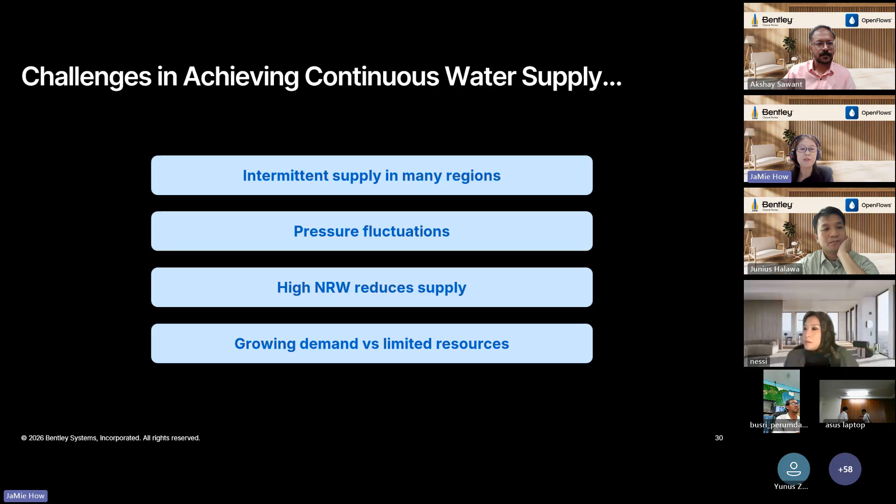And in many regions today, as you can see from this slide here, achieving continuous water supply is still a major challenge. And intermittent supply is very common and often due to pressure fluctuations and system inefficiencies. So at the same time, high levels of non-revenue water will reduce the amount of water that is actually available for distribution. And with growing demand, water bodies or agencies are also under pressure to do more with limited resources. So the challenge here is not just about producing the water supply, but also delivering it more reliably, consistently and efficiently as well.

So if we look across the three parts, like what we mentioned just now, part one was on identifying and reducing the losses. Part two was on real-time operational intelligence. And now in part three, we bring all this together to scale toward a continuous supply. Because achieving continuous supply is not just one step, it's a result of continuous and cumulative improvement in your whole network or system.

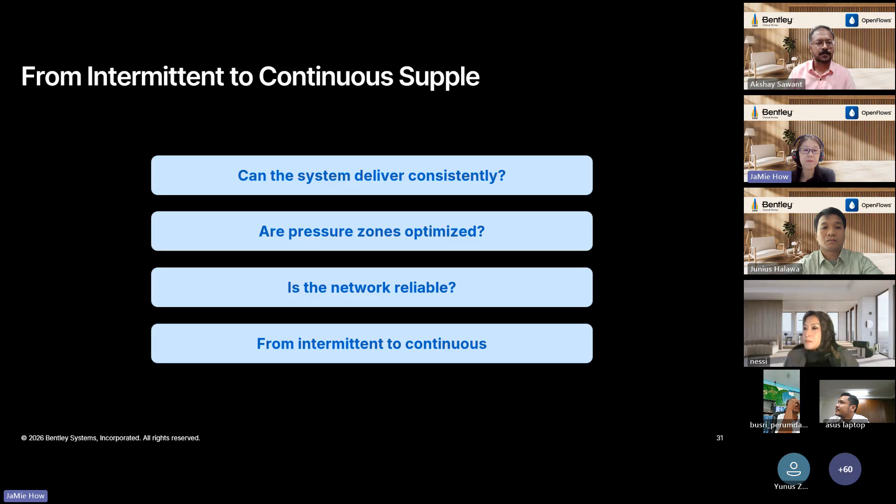So for this, they need a large scale and reliable water distribution system. And by doing that, an 80-kilometer regional water supply system was then developed to support this large-scale distribution. And using OpenFlows Water and digital workflows, they were able to carry out all detailed assessment like pipeline sizing, assessing the pressure zones, and also pump efficiencies.

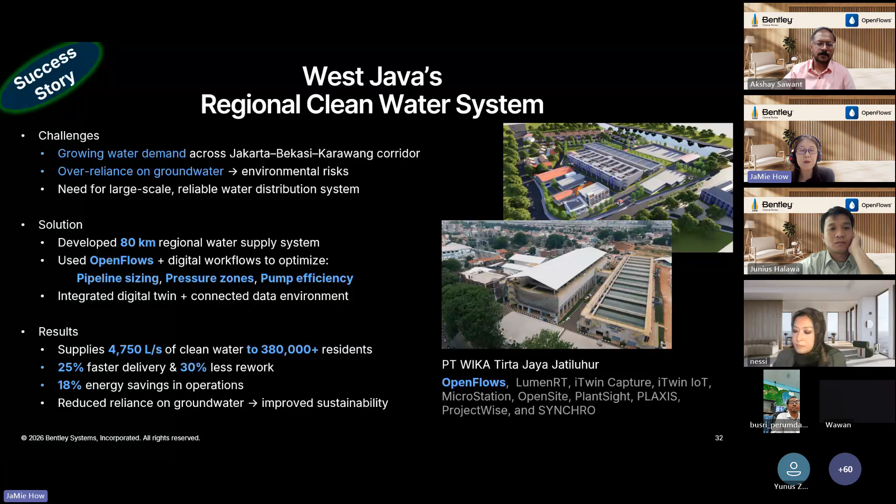Today, the system now delivers approximately 4,750 liters per second to more than 380,000 residents in that area. So by optimizing the network design, the project achieved faster delivery timelines and also reduced reliance on groundwater. So this case study here shows how infrastructure and system planning come together to enable a reliable water supply at a large scale.

And so to support this kind of system and planning optimization, water bodies or utilities need to have the ability to model, simulate and evaluate the different scenarios in the network or in the system. So this is where OpenFlows plays a key role in your hydraulic model. OpenFlows not only supports water distribution networks, it also supports wastewater and stormwater network systems as well. So it will help all of you engineers and water bodies and agencies to test different kinds of strategies, understand the system behavior better, and also make more informed decisions before any implementation is done.

So the three core OpenFlows solutions, the water, the sewer, and the storm, are also complemented by the OpenFlows Hydraulic Toolset and OpenFlows Flood. The Hydraulic Toolset is for calculation of specific components, and OpenFlows Flood is for advanced flood risk analysis and assessment purposes.

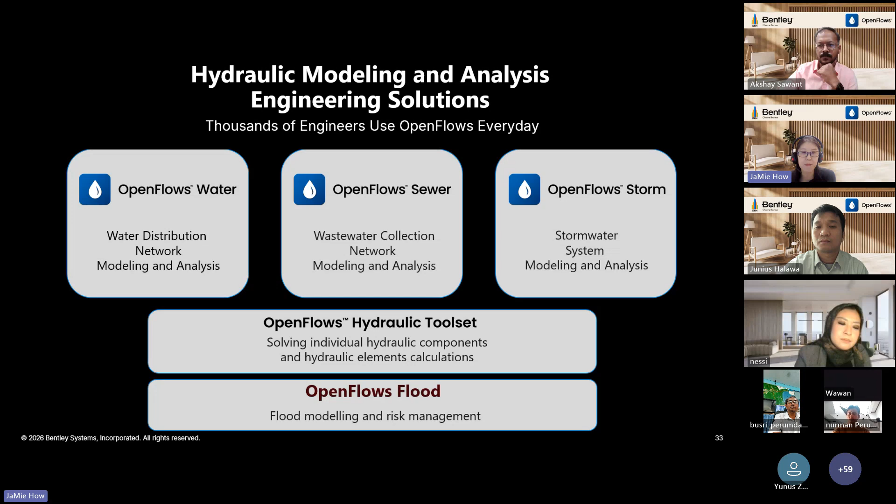And the tiers, we have also shown this in earlier parts, mainly defined based on your model capacity and the extent or requirement of your assessment, such as the number of pipes or elements. So you can choose a setup that fits the scale of your network or the system that you want to study. So each tier uses the same modeling environment and methodology, just with increasing capability. As we can see here, OpenFlows Water is our focus for today.

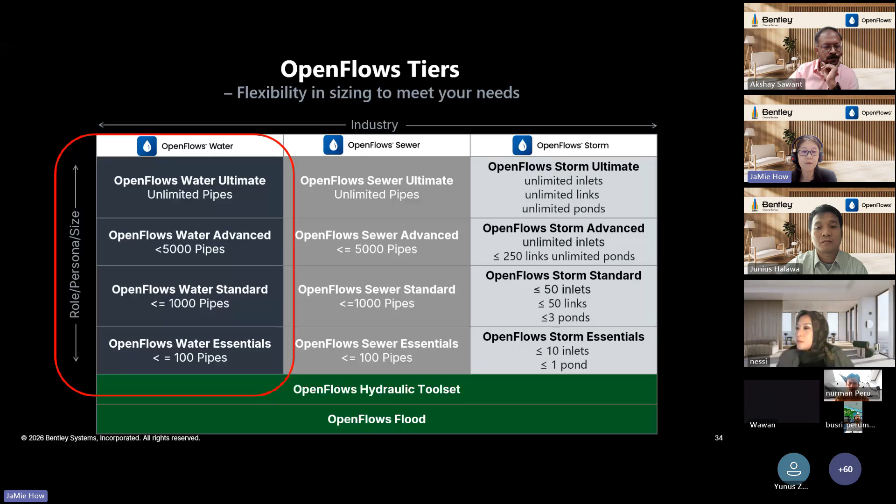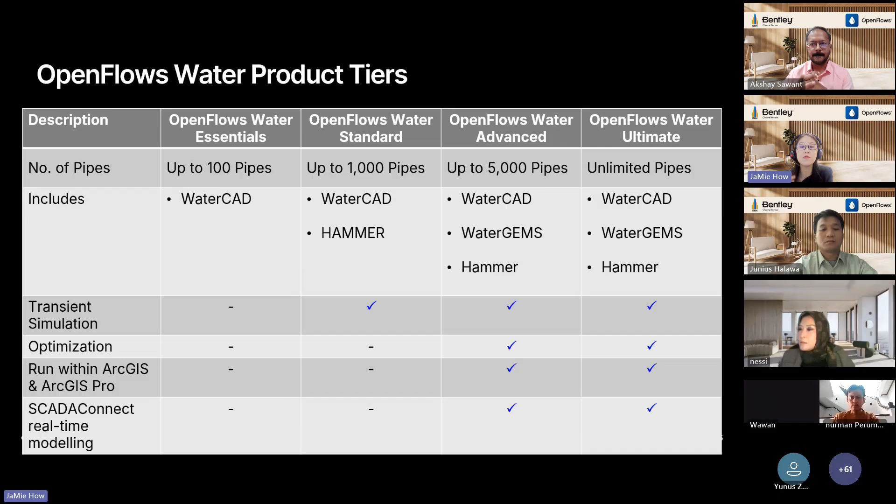And this slide here is just a very simplified comparison that shows how each tier supports different levels of your assessment, depending on the complexity of your system and the type of study that you want to perform. So from very basic network modeling to more advanced capabilities from left to right, like transient analysis and optimization, the higher tiers will allow you to evaluate all this in your system in greater detail and make a more informed and better decision on your system. So this is very valuable when planning for system improvements and when you want to move towards a more continuous water supply system.

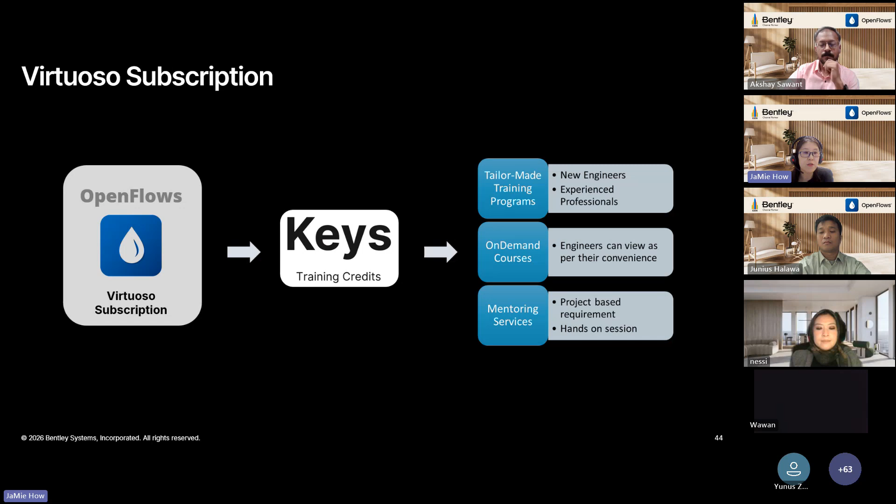So since today's focus is on water, we are just going to look into the water solution, OpenFlows Water.

The essentials and standard tiers come with 1 key per license, and the advanced and ultimate tiers come with 2 keys per license. 1 key is almost 2 hours of free training that you can redeem.

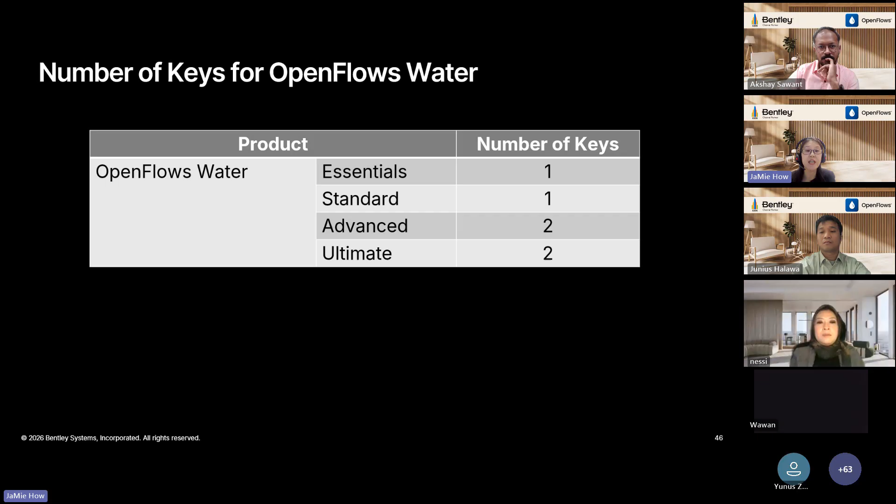So in summary, Virtuoso is a practitioner license with named user, so you can reassign the license if required. And it is a yearly investment without any additional maintenance fee. So with this, you can have better control over your yearly software cost for your project. And throughout your whole active subscription period, you can have access to free technical support assistance, free software updates and upgrades, and also expert services using keys.

So first, let's discuss Indonesia, the current challenges the water supply systems or the utilities are facing, and then we'll move on to the solutions. So this is the agenda that we will be following. First, we will discuss the sector, then we'll talk somewhat about the design parameters. Then we'll talk about OpenFlows WaterGEMS, how we can convert an intermittent system into a 24/7 system. Then we'll talk about extended period simulation, variable frequency drives, pump controls, valve controls, and finally we'll talk about transient analysis. And also we will be talking about energy optimization, how you can use OpenFlows WaterGEMS for the same. All right, so let's talk about the sector, that is the water sector.

When we talk about institutional structure and service delivery model for Indonesia, it is highly decentralized. Urban water supply is mostly decentralized, managed by approximately 380 regional utilities called the PDAMs, and I have been fortunate to visit some of them across multiple cities in Indonesia. National ministry roles: multiple ministries share the oversight. Public works supports infrastructure, home affairs governs the administration, and health sets the quality standards. You can also correct me if somewhere I'm going wrong. This is whatever information I have from the internet and whatever visits I've previously done.

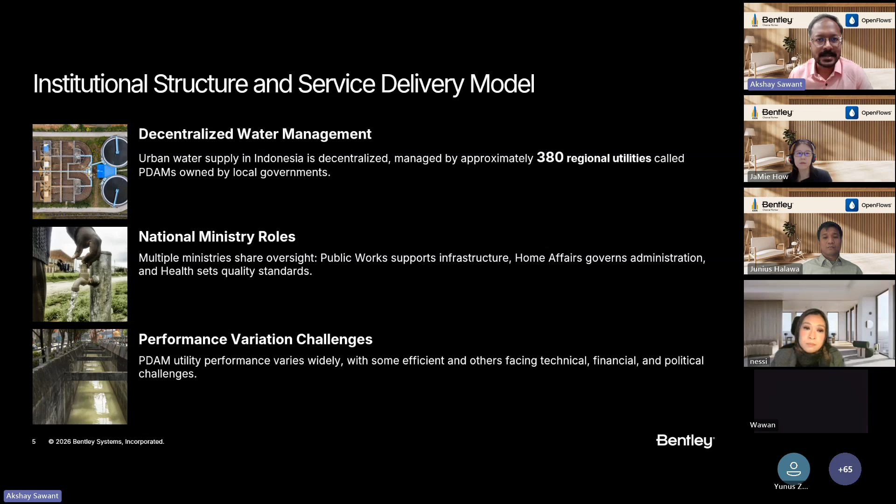And the performance variation challenge, that is the main thing. PDAM utility performance varies widely, with some efficient, and some of them facing technical or financial or political challenges as well. Right. So we will be discussing mostly about the challenges. When we talk about sources, it is diverse sources. Indonesia relies on surface water sources like rivers and reservoirs, and many cities, including Jakarta, heavily rely on groundwater, right? And the next challenge is intermittent supply. Most of the utilities are not functioning 24/7. It is intermittent supply. And because of this, there is low pressure, storage limits, high leakage rates, and so on.

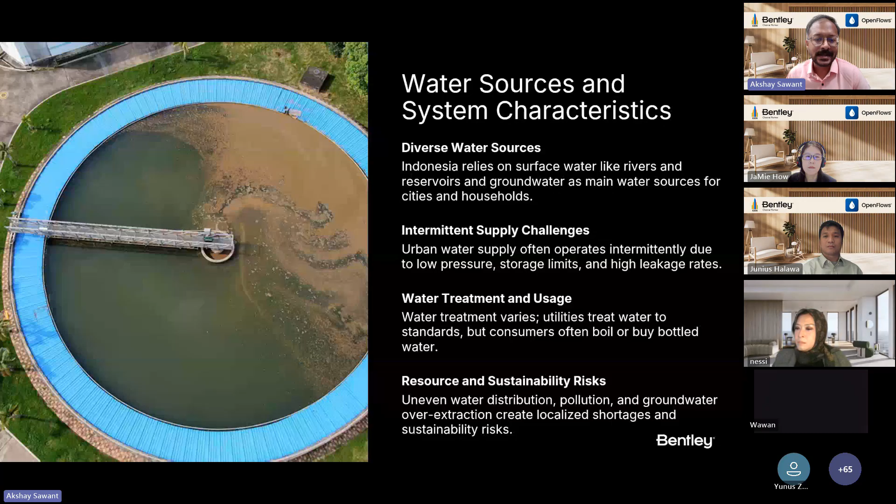When we talk about treatment and usage, water treatment again varies. Utilities treat water to the standards, but consumers often boil and buy bottled water for drinking purposes. And resource and sustainability risk: uneven water distribution, obviously pollution, groundwater over-extraction, right? So all these are challenges which need to be overcome.

When we talk about coverage and performance at the national level, the service coverage and access, for the overall water supply system, 94% have access to improved water sources, but only 20% have piped water connection nationwide. Means 94% of the population has got access to water, but 20% have got piped supply up to their household, right? Or maybe groundwater extraction is dominant compared to the water supply system, right? So mostly people don't opt for the piped water supply system.

Instead of that, they use their own groundwater sources to consume the water. When we talk about equity and quality, households without pipe connections pay more and face higher health risk from inconsistent water quality. It all depends on the quality of the groundwater, right? And the sewerage coverage is as low as 2% for the urban population, which is actually very, very low. This also needs to go up.

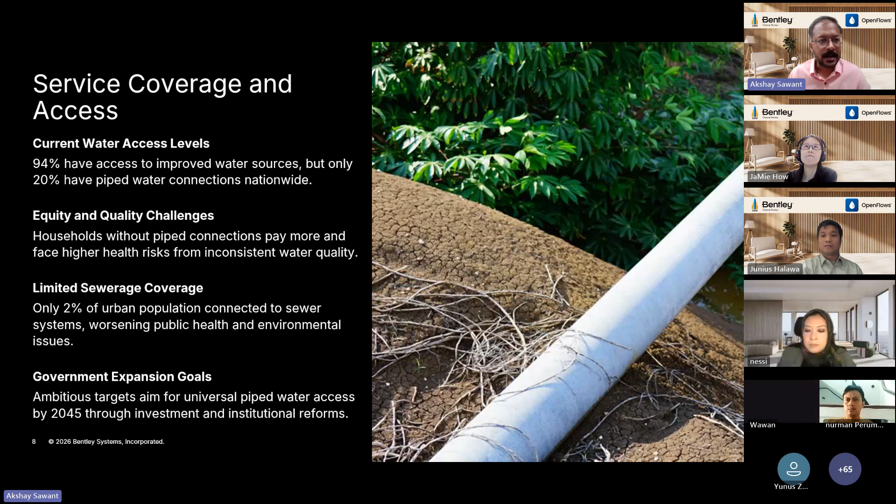And when we talk about government expansion goals, there is an ambitious target of universal piped water access by 2045, right? So let's see how it goes. There are around 20 years, and in that, we need to cover the whole of Indonesia with piped water supply systems.

When we talk about the common challenges in urban areas, the first challenge is high non-revenue water. I think except Singapore, everybody in the world faces this. Singapore has got a very good system. Only a handful of utilities across the globe have achieved good NRW targets, but many of them face issues of non-revenue water. In many places the percentage is above 50%. Okay, so this is a worldwide issue and everybody is trying to work on it.

When we talk about intermittent water supply, water supply is often intermittent with low pressure, failing to reach higher buildings effectively. Again, aging infrastructure is also an issue. In cities which have been there for many years, some of the pipelines are now old, and replacement is required because of frequent breakdowns and other maintenance issues, right? So that is aging infrastructure. And the water quality concerns: pollution and inadequate treatment lead to unsafe tap water, undermining public trust in safety. So these are all the challenges.

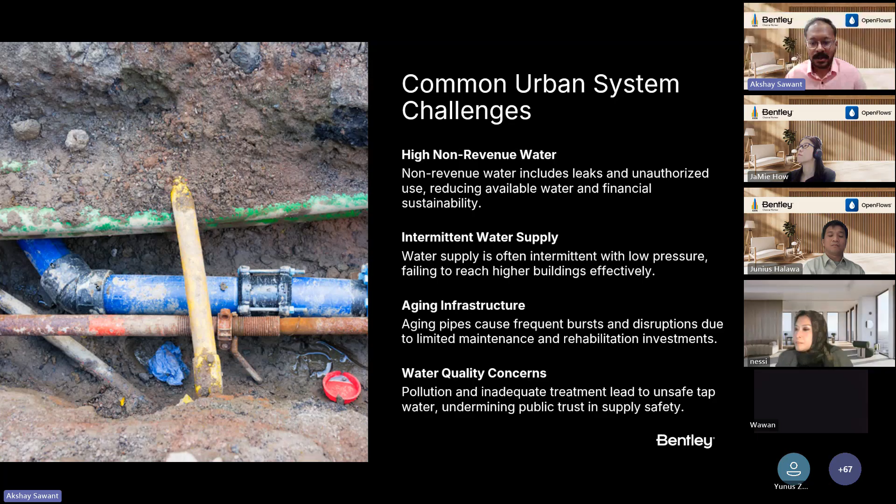When we talk city-wise, let's talk first about Jakarta, that's the capital. 64% of Jakarta's population has piped water access. Again, Jakarta has its own problems. Only 64% of the population is covered. What is the rest of the population doing? And there are so many commercial establishments in Jakarta. So what are these establishments doing? They're extracting water at a very high rate.

Groundwater extraction is okay, but if the extraction rate is very high compared to the recharge rate, it is a problem. In a city as big as Jakarta, you're simply extracting water at a very high rate, and the water is not recharging. I know the rainfall is very high in Jakarta and overall Indonesia, but groundwater recharging is still very important, and that is not happening. And you can see subsidence happening every year. I forgot the rate of subsidence, but because of subsidence, Jakarta is facing flooding, majorly coastal flooding. So all these issues are there.

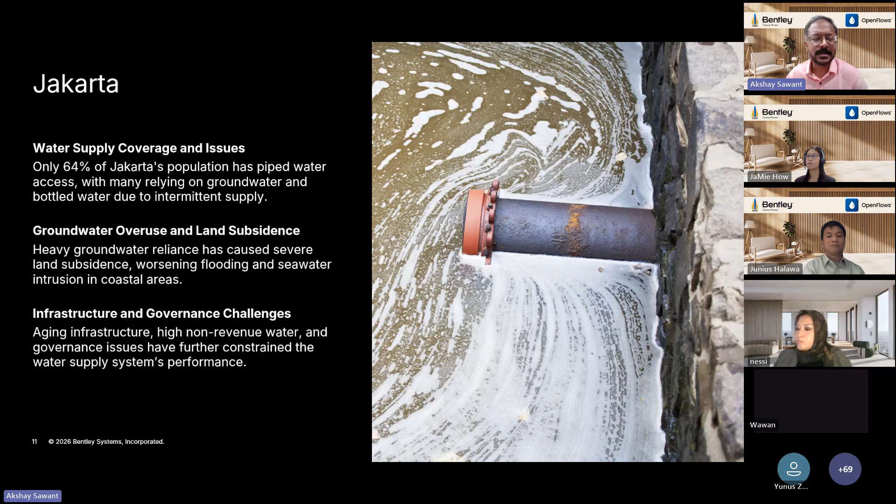Only one thing can improve that, imagine, and that is water supply systems. If 100% of the population gets connected with a piped service connection, you will not have floods, right? A common man may not be able to understand, but as hydraulic engineers working in the field, you know why Jakarta is facing this flooding issue every year. Mostly, coastal flooding is due to the subsidence, right? So yeah, all these challenges are there.

When we talk about Surabaya, I was fortunate enough to visit PDAM Surabaya, and let me tell you one thing: the WaterGEMS model prepared by PDAM Surabaya is the largest model I have ever seen in my life. In the past 8 years, that is the largest model, in kilometer terms around 6,700 kilometers, and it may increase further with more details. And it has got so many scenarios in the model as well. So it is the biggest model that I have seen.

And having said that, software has helped the PDAM a lot, and because of that, PDAM Surabaya has very good coverage; everybody has got a piped service connection. The only challenge is the new areas popping up, the new urban growth happening around Surabaya. So the utility is trying to match that, right? And I think software is helping them in that part.

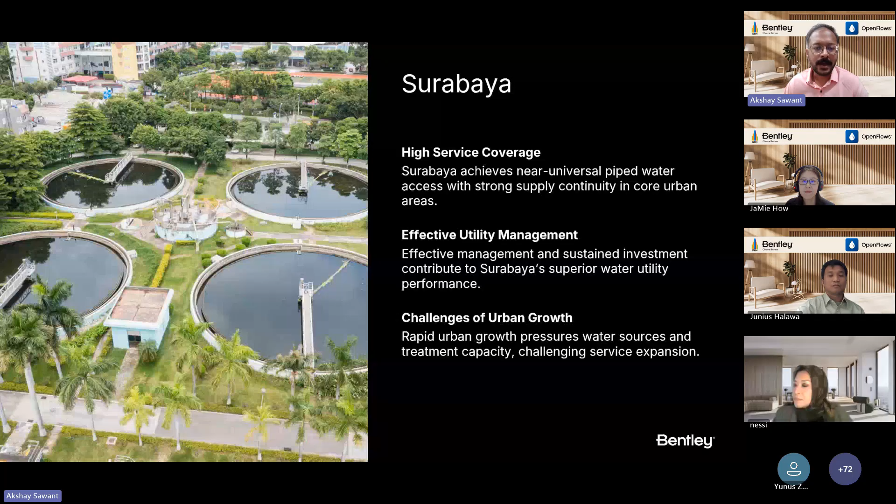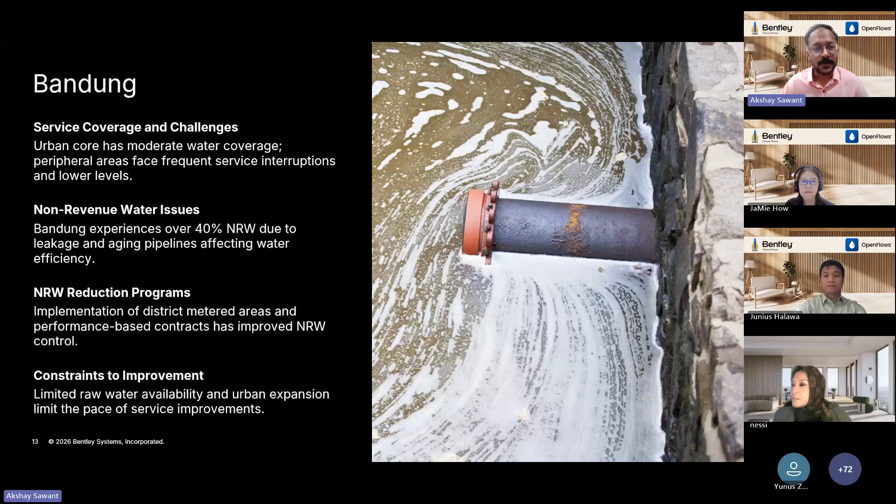When we talk about Malang, it has got good service coverage. It is again near Surabaya, right? So it is again having a very good service coverage. It has got continuous supply. It demonstrates strong utility performance. And talking about NRW, the city reduced its NRW to about 16%, which is very, very good. Okay. And it is well below the national average.

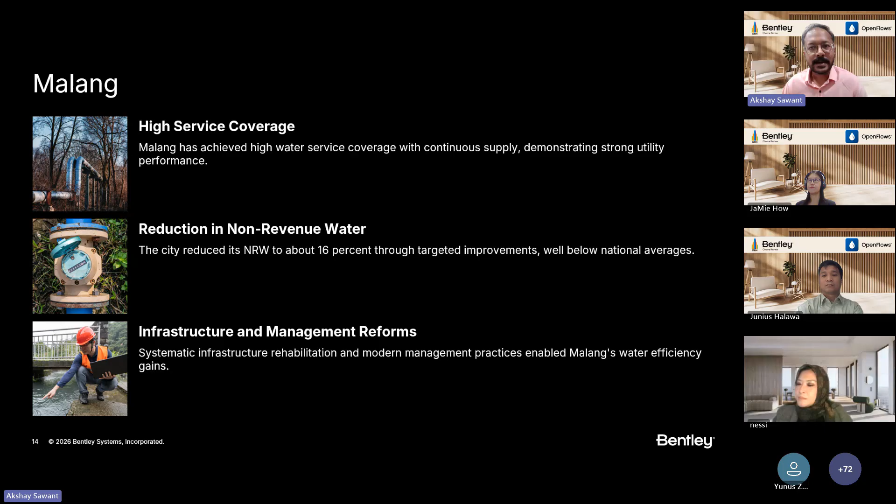Talking about infrastructure and management reforms, systematic infrastructure rehabilitation and modern management practices enabled Malang's water efficiency gains. So this can be a case study for all the other utilities around the country. Okay. Now, when we move forward, let's talk about solutions. And as I said, some of them may be repetitive.

The need. Let's talk about the need first and the challenges. So first thing is intermittent supply. With intermittent supply, you have to send the same amount of water in few hours. Means whatever a person has to consume in 24 hours, the same amount of water you have to now send or deliver in a small amount of time, which increases the pressure on the system, right? And that brings down the performance of the system.

So what does intermittent supply correspond to? It corresponds to low pressure and inequity. Suppose it's a tank from where the water is going to be supplied; it's a behavioral change that needs to be coming into the citizens. The water reaches first to the consumers who stay near the tank. They will start filling up their own tanks, own reservoirs, whatever they have in their homes. This is a general thing that occurs everywhere.

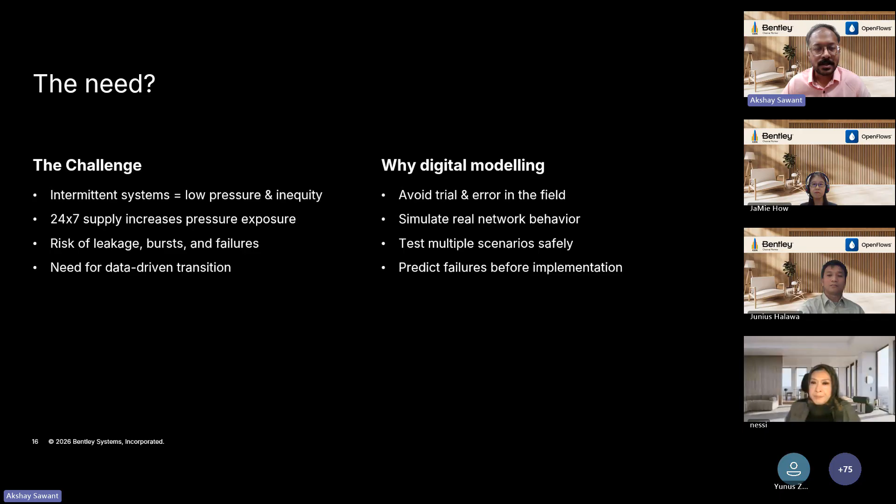Let's talk about the first step, that is calibrating a model. So suppose a system is already running. Now you want to test your system, or you want to check where the NRW is or where the leakages are. Okay, this is just one point. There are so many other points, like you want to test the system for any performance indices. So suppose you want to check how many consumers are getting affected because of throttling one valve. This is one condition.

You want to check the performance of the pumps. This is another condition. Similarly, NRW is one of the conditions. So you want to check that. So how can you do the assessment? Let's check with the help of this video.

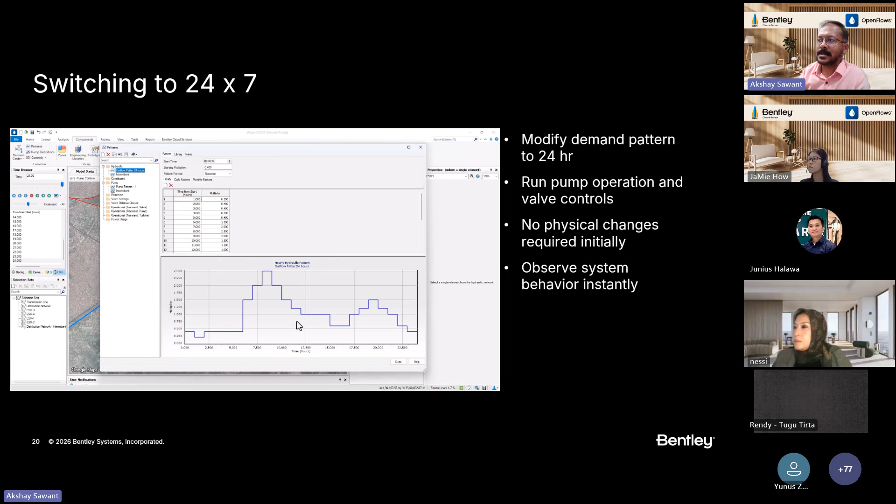Now I have changed the scenario to 24/7 pattern. Now you can see there are no dark nodes. That means there is pressure every time. This is the pattern that has been given for the 24/7 system. Again, let us check this particular tank for its capacity graph. So you can see now there is no overflowing or emptying of that tank. So you have now switched to 24/7.

Now again, one more point over here: when we were in the intermittent scenario, this part of the network was not present. When we switch to 24/7, this part of the network has been added into the main model. So such types of scenarios you can go on creating. This is kind of a new extension for this particular project. Okay.

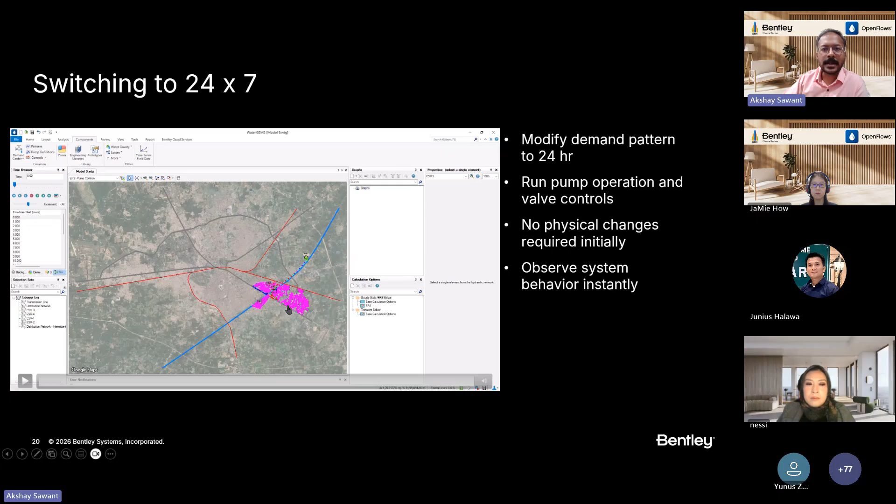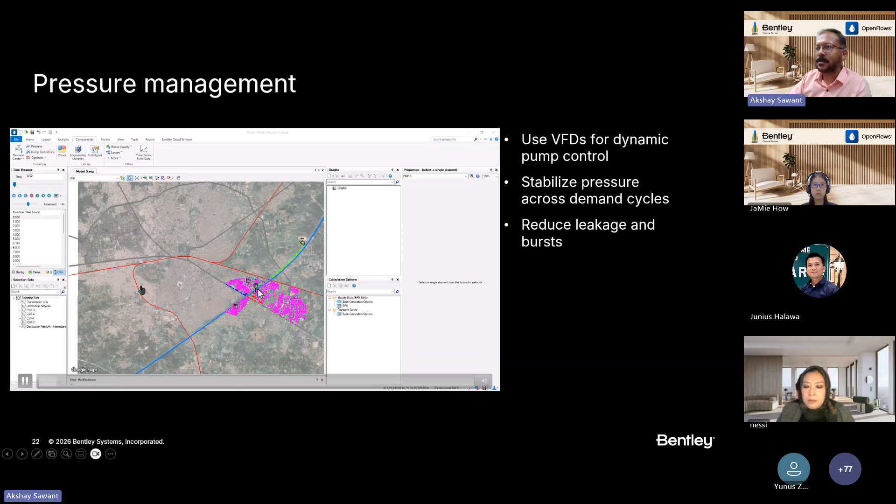Now let's talk about the next step, that is pressure management. And again, there are so many ways to do pressure management. One of which we will discuss, that is use of variable frequency drives. Somewhere it is also called variable speed drives, which are very, very useful when it comes to pressure management. Now, in the same model, there is a VFD pump. Now, what is the role of this pump? I'll first explain. So this is a tank over here, and then there is a pump.

So the tank which is already there is an elevated service reservoir, but the requirement of the pressure at the end point is around 25 meters H2O pressure. And this tank height is not that much. The tank height is small, around 15 meters. So the head is not available. So there is a booster pump installed just in front of the tank, which is helping to improve the pressures in the downstream. And this pump is a VFD pump.

Okay, depending upon the supply, the speed of the pump motor changes, and the pump performance remains constant, or the head requirement remains constant. So, how have we done that? Let us see. So you can observe the levels over here for the tank, and this is the pump. It has been defined as a variable speed drive pump. Okay, it is based on the target head. You can also add a fixed flow or pattern based flow, and the hydraulic grade of this particular junction. This junction has been associated with the performance of this pump.

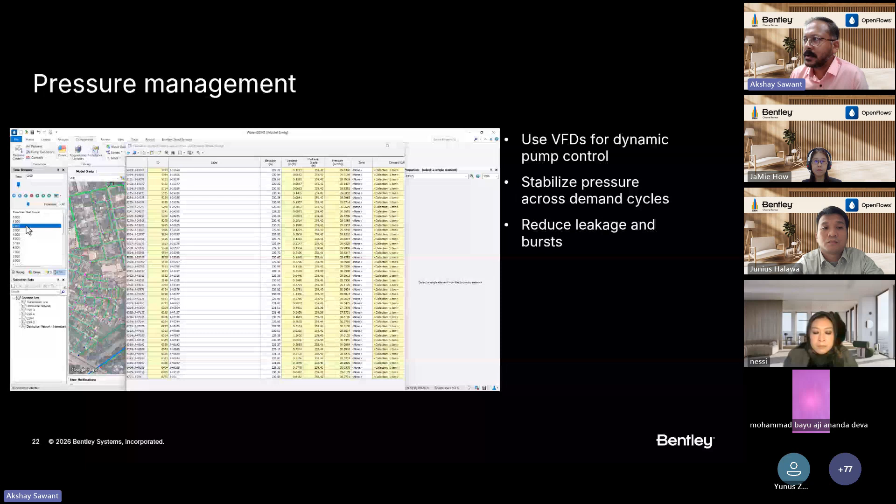Okay. And let me also show you the pump definition. It's 11 meters of head. So it is just adding 11 meters of head into the system. Now let's trace whatever is in the downstream of this pump. Let's check the junction pressures. You can observe the pressures against the time browser. You can see how the pressures are changing, but those pressures are not fluctuating very much. It is just some points difference. Okay, that is the beauty of any VFD system in place.

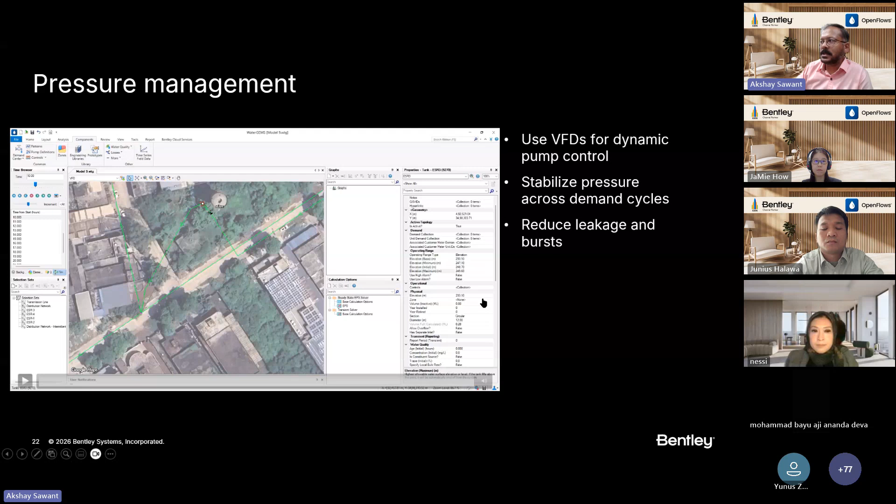Right, so this was the elevation of the tank, 249. Upon that, we are adding 11 meters of head that is acting as a booster pump. So this is one of the ways to manage your pressures. Now talking about step 4, comparing scenarios. So you create multiple scenarios. I told you about Surabaya. They have more than 50 scenarios. So you can also have multiple scenarios in the same model.

In this model right now, you can see the intermittent scenario is on. Okay, and you can see lightly there is some part of the network which is not active in this particular scenario. Here also there is some network; because of the background it may not be visible to you, but there is some part of the network over here and over here which is currently inactive. Sorry. Okay, so in another scenario, it will be active.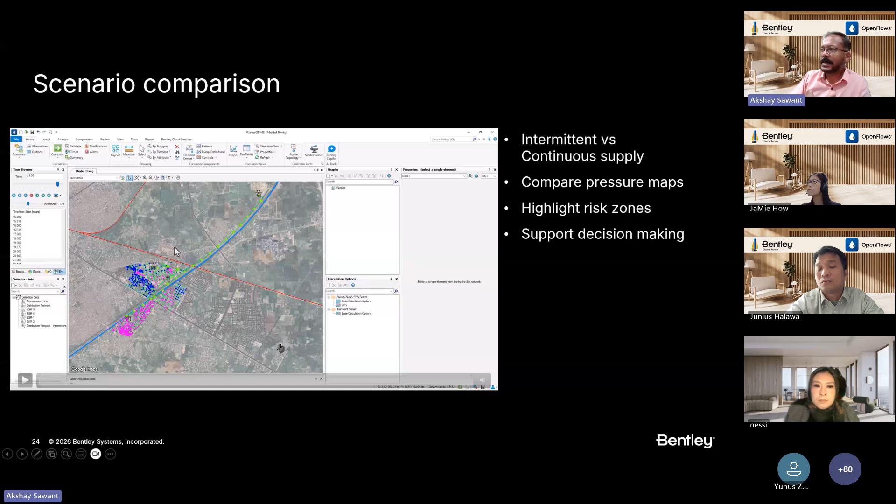Now, how can you compare scenarios, or what type of data can you compare? In the review tab, there is something called scenario comparison. Okay. So you select any scenarios. Now we are comparing a 24/7 VFD scenario with an intermittent scenario. Just press OK and it will show you which properties are changing. So first of all, it is the topology which is changing, because some part of the network is not present, some part of the network is present, right?

You just press this compare button and then you can check one by one. So here you can see these are the junctions which are active in this particular scenario and are not active in this scenario. Okay, so these are the junctions.

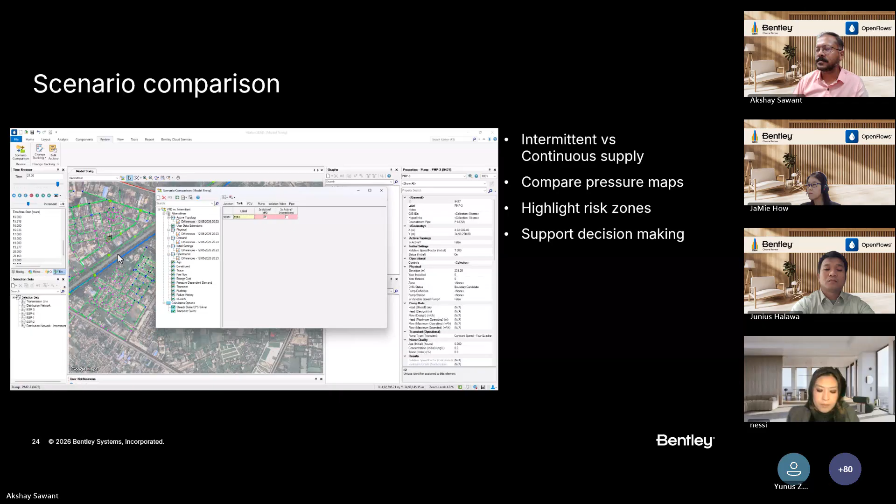which are inactive. Similarly, you can check pump, pipes, tanks, all the elements which are present or not present in any of the scenarios. Next, what you can check is, yeah, so this is the tank which is not present in intermittent. It is still under construction, so it is not present in the intermittent supply system.

And this is the physical property. So which physical properties are changing, you can check for the pumps, pipe, tank, whatever elements are present, you can check which diameters are changing in the scenarios, what material is changing, whatever change is there in between the scenarios, you can check. And mostly in this particular model, the demand has changed.

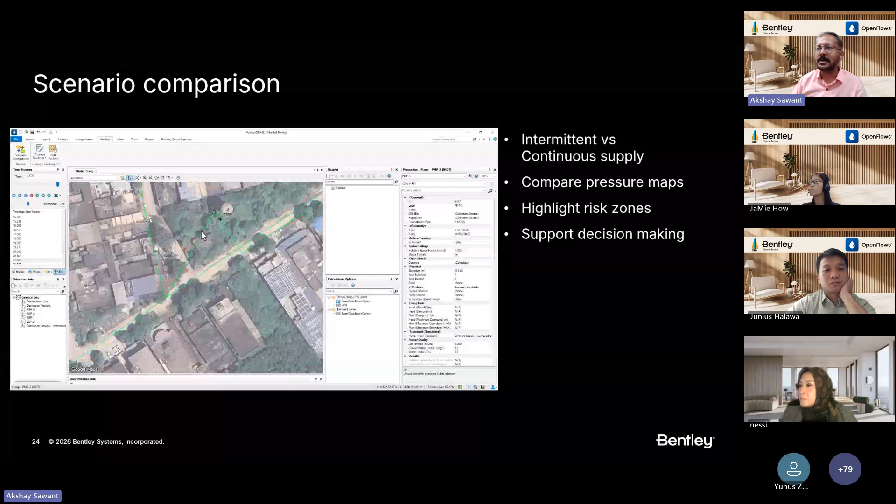Now, VFD has been run for ultimate case or another demand, I can say, another horizon, and intermittent system was run for another horizon. Okay, so there is change in all the junctions or the demand of all the junctions. So that is how you can compare the scenarios. You can also create graphs, overlapping graphs.

Now, I'll just pause this video and explain a bit. So you can see there are two graphs, okay, of the same tank, and it is showcasing the percentage full level. The first blue colored graph that you see, the water level over here, it is reaching 100%. That means it is now overflowing. Okay, it cannot accommodate more water inside it.

After around 6 a.m., you can see when the consumer is consuming water, the tank water level is going down, and it is also reaching zero. That means it is getting emptied. And if you remember the previous video, there were some dark points or dark nodes which were indicating there is no pressure. That means there is no water. And it is the downstream of this particular tank in this particular time.

So you can check all of this data. You can assess your models with all of such types of analysis. Now, this is the same tank in another scenario, that is 24/7 scenario. You can see how the water level drops down a bit, again it increases.

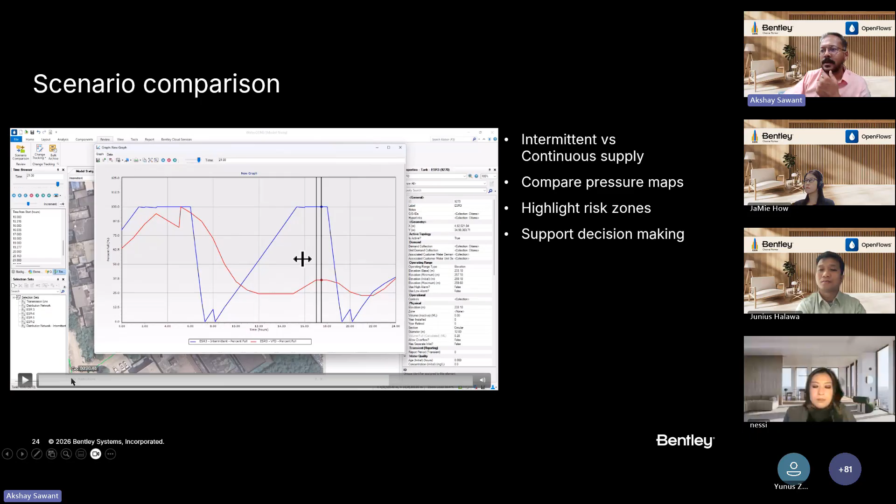So here actually the controls are given such that the pump is not working in these 2 hours, and again the pump starts working once the consumption increases during the morning time. The water level recedes, and again in the evening it increases a bit, again at the night it decreases, and so on. So this is only for 24 hours, but you can keep on running this until you find equilibrium for your model. Okay, so such type of analysis you can do, such type of comparison.

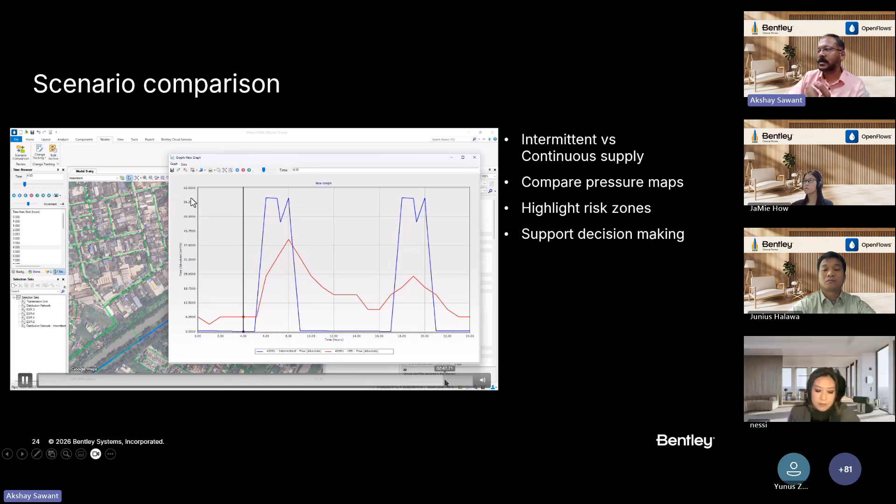Now here, okay, this is another comparison, flow of the pipe. Now, when we talk about the flow of the pipe, you can see the red, again, it's a 24/7 system. The blue is an intermittent supply system. Now you can see the flow is very high in the intermittent supply. Why? Because as I mentioned in the beginning, you have to deliver the same amount of water to your consumer in very less time. So in that less time, you have to deliver more amount of water, and that stresses the systems, stresses the pipes. Okay, so such types of studies you can do.

Let's move to the next point, that is transient analysis. Now, you saw there are so many pumps in this particular model. You may also have so many pumps. Even if you don't have pumps in the distribution side, you will have pumps in the transmission side, and we need to do something called as transient analysis. If we don't do that, there are chances of pipeline burst, and sometimes if the pipe is of a bigger diameter with a heavy demand, demand as in the flow, heavy flow, it can also be catastrophic sometimes, right?

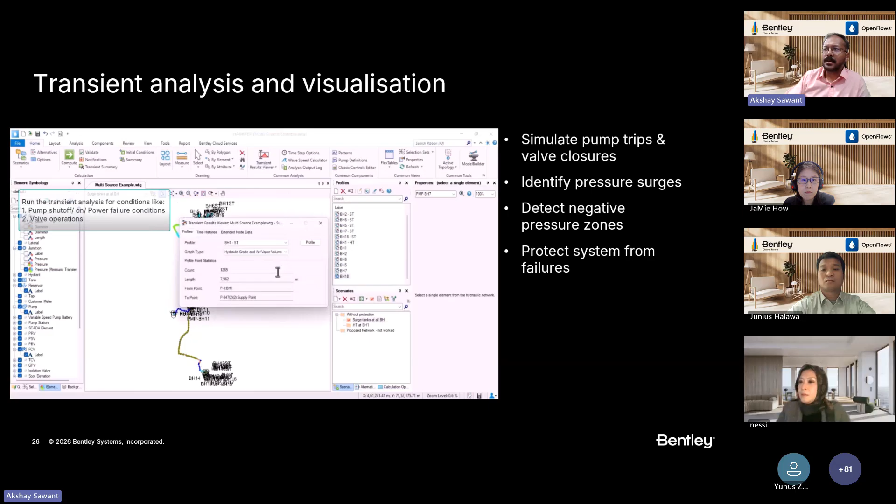So let me run this video. Now, this is not a typical example of a distribution network. This is basically a transmission network. Now you can create multiple graphs to study how the transient pressures are working. Okay, again, there are two scenarios in this particular graph. First, let's talk about the air vapor volume.

You can see there is a flat line and there is a pink line which is having some hump. So when we talk about the flat line, that is with the protection device, and this hump that you see, this is the vapor volume, like it is reaching around 500 liters of air volume, vapor volume.

So this is one without protection. Okay, similarly, if you see over here, the green line indicates the hydraulic grade, which is dropping because of some condition that we have simulated. In this case, we have simulated the power failure condition where the pump is tripping or pump is shutting down. Similarly, you can create multiple conditions of valve operations. Suppose a valve is throttling for 15 minutes, 10 minutes, any kind of that condition, you can simulate and

check the transient pressures. These pressures are very important because a wave travels with the sound speed inside the pipe, and that causes a huge trouble. The water also kind of flows in with the wave. The water also travels with a very high speed. Okay, so you can see there is down surge or a negative pressure. Now this negative pressure can collapse your pipe and road cave-ins may get formed.

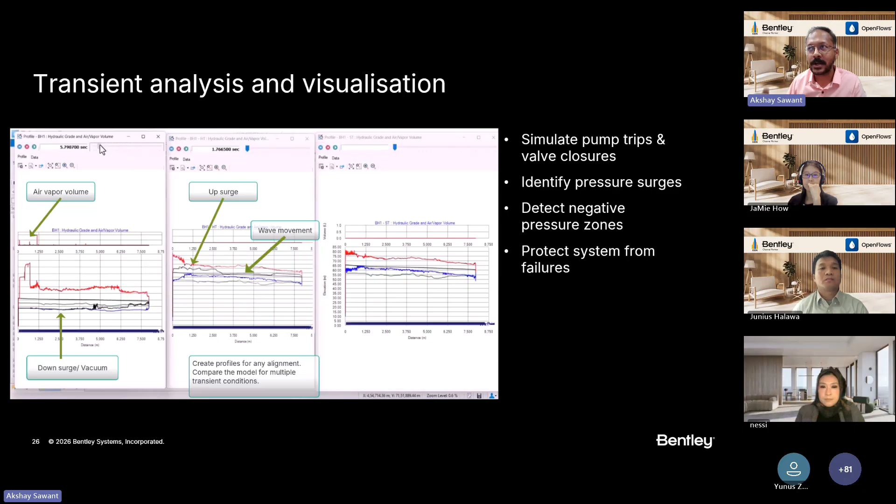So what are the protection devices that are available in the software? It is hydropneumatic tank. We also call it air vessel. Some places it is called as surge vessel. Then we talk about one-way surge tank, two-way surge tank, then there are different types of air valves that you can install. Rupture disc. You can also install different types of surge valves. So all these are available to protect your system. And after that, I'll discuss this part and then I'll conclude and stop for the questions.

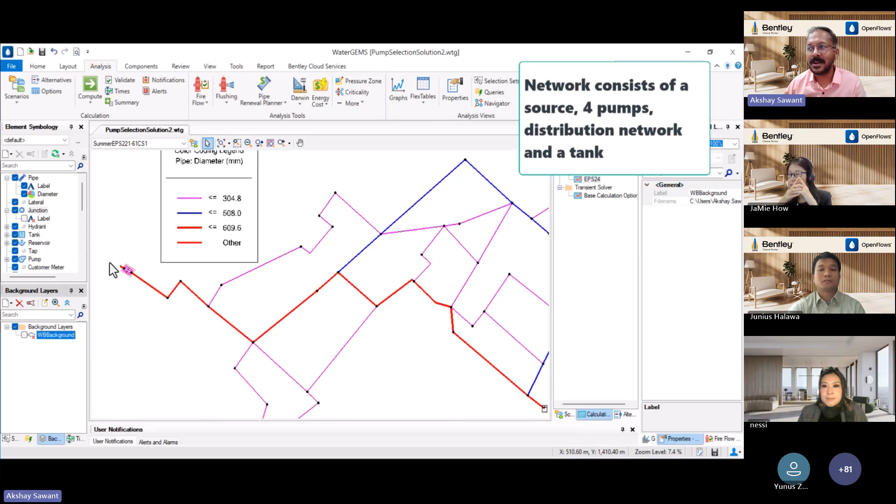So yeah, again, whenever we talk about 24/7 system, or for that matter, intermittent system, the most important point is energy consumption. Every contractor or every utility that is running the system gets very big energy charges, right? So they spend a lot in that. So how can you optimize any system? Let me run this video. So this is a source of water. Then there are 4 different pumps, 2 big pumps, 2 small pumps. And this is the whole network. There is a tank at the end. And let me run this quickly. So again, let's go into the summer scenario.

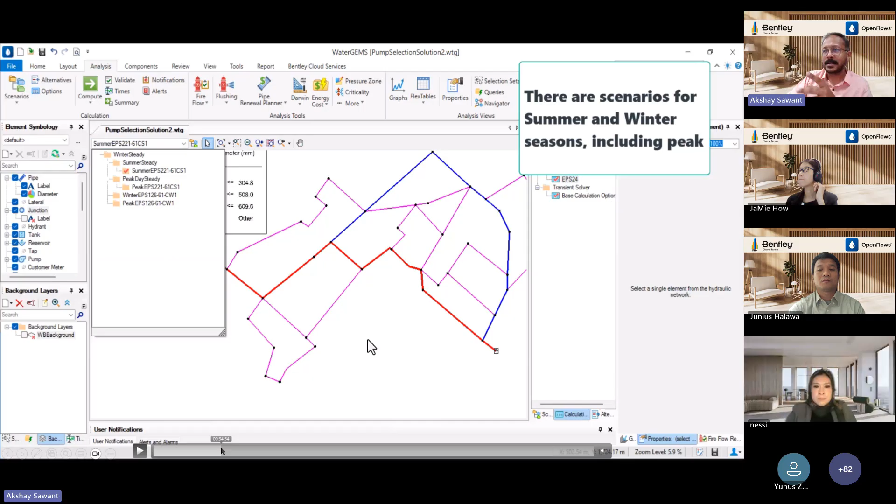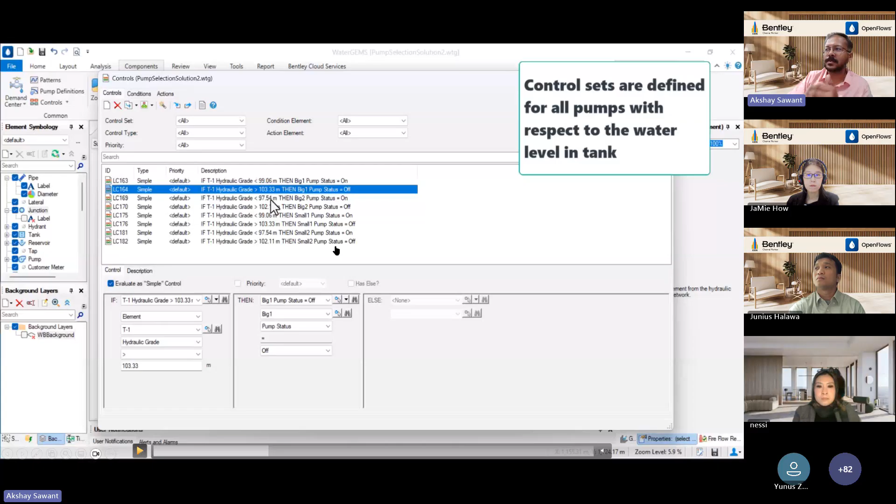These are some controls given for when a pump will turn on and turn off. Like if the tank level is below 99.06, big pump 1 will start. Okay, if it is above 103.33, big pump 1 will stop, and so on. There are so many conditions that have been given to run the model. Once you run the model, let me just explain this.

Now this is the hydraulic grade. It is starting at around 102. Once it falls to this level, you can see the other pump also starting. So this is the flow of big pump 1. It is continuously running. The blue color is that one, and the red colored one, you can see it is only starting at some parts of the whole run.

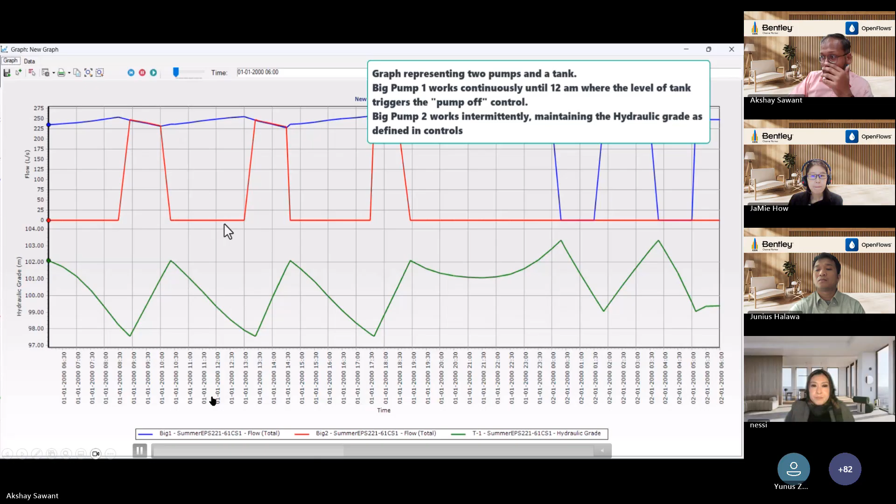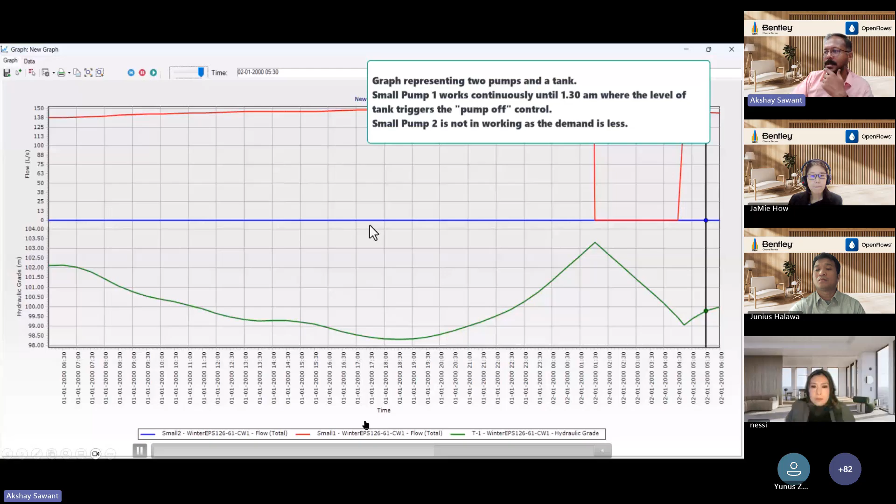Over here, if you see, both the pumps are shutting down at this point of time because the hydraulic grade is going above 103 or something. Okay, so this is one scenario. Then there is another winter scenario where only one pump is functioning continuously because the hydraulic grade is not dropping that much.

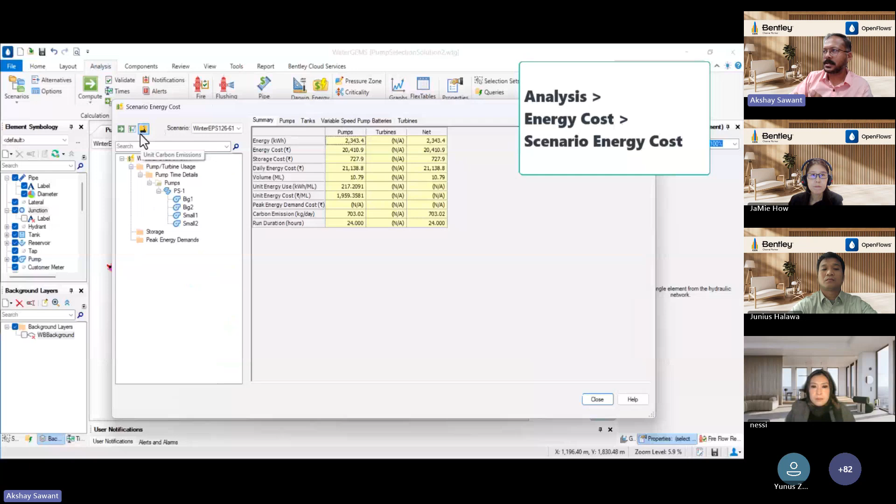Once you do all of that, there is something called energy cost computation. You go into those options, you define your rates. It can be a block rate, it can be a constant rate, it can be a rate including the peak demand charges as well, if you have any of that. Now here it is 8.7 Indian rupees. In your systems, it will be Indonesian currency per kilowatt. Okay.

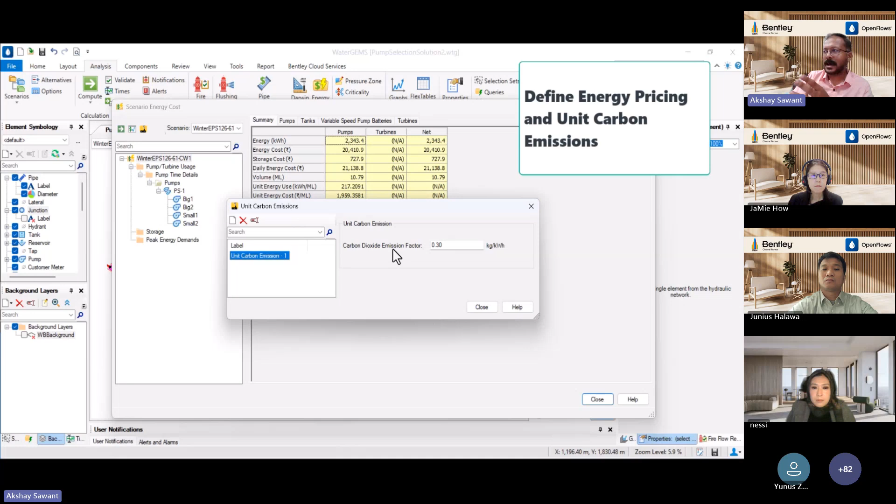And you can also add the carbon emission data per kilowatt, and then you can check the results. You can compare the scenarios. You can check all of these details like the total energy consumed, total energy cost, the storage cost of energy, the daily energy cost, the volume of water that was passed through the pumps, unit energy use, unit energy cost, peak energy demand. Here it is 0 because in this particular case, only the block rate has been given. Then the carbon emission and so on.

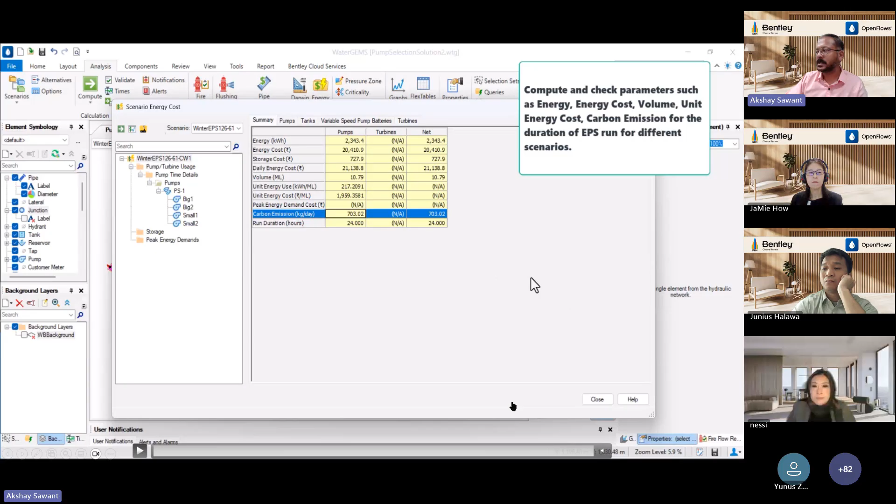So run duration also, here it is 24 hours. For your case, it may be some intermittent hours as well. So you just test your system with multiple scenarios, and whichever is the most efficient scenario, you can check from here and go for its operations or replicate that in your operations. Okay, so I think with that I will stop for questions. Over to you, Jamie.

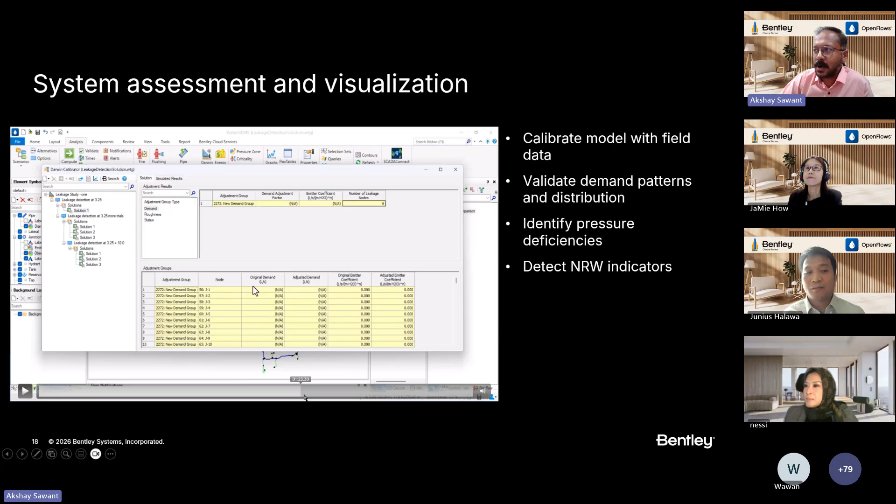Yeah, this one. So whenever you are using this calibrator, once you are done with all your trials and whatever data you are getting, at the end you can check with the chart options. You can add this scenario. You can also add that in the final result.

So this is a continuous process. For whatever observed data has been entered right now in the model, this is the result. But after a week's time, or maybe some hours, the pressures will be different. After a few days, or when the season changes, like in the rainy season, this data will be different. In summer it will be different, and so the functioning of this model will be different.

Also, not just the Darwin calibrator, you can also run PDD, pressure dependent demands. There is an option to run it in the model. You can test your model with that as well. It gives you more realistic results. Darwin calibrator is one thing, but you can also explore PDD and run your model with it. It will give you more realistic pressures at the endpoints or at the consumer ends.